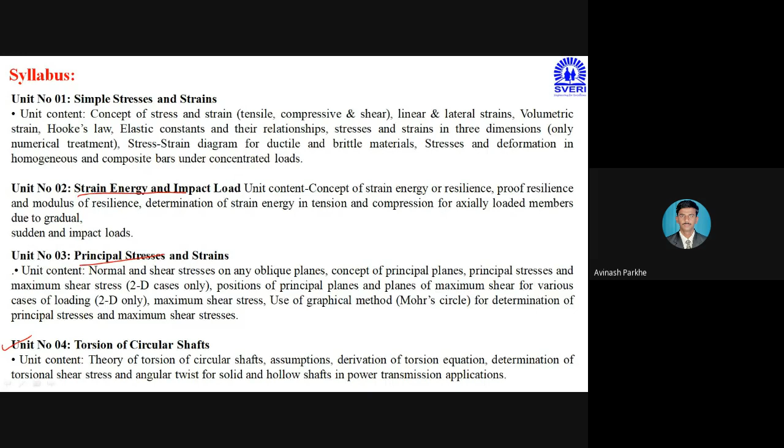So this is about chapter number 4, and in the second section, obviously we have discussed all the calculation related to only one structure, that is beam.

In chapter number 5, we are checking the behavior of the beam after number of loadings, meaning we are drawing the shear force diagram, we are drawing the bending moment diagram, and through that particular diagram we can obtain the critical points. We can check the critical points.

So which critical points? Where shear force is 0, where shear force is maximum, where bending moment is 0, where bending moment is maximum. Checking all these important points means checking the strength of that particular beam.

Similarly, in chapter number 6 we are calculating bending stresses, we are calculating shear stresses. In the last chapter we are calculating slope and deflection.

That means in all these 4 particular chapters we are checking the strength of that particular beam in the form of calculation of SF, BM, bending stresses, shear stresses, slope and deflection.

So therefore this particular subject is introduced in your syllabus, that is basic strength of material. Strength of material means we have to check the strength of any mechanical component, any civil structure which is used in any type of application.

If I will take the example of, once again, a vehicle.

For example, if we take Tata Motors manufacturing any vehicle, directly they are not launching that particular vehicle in the market.

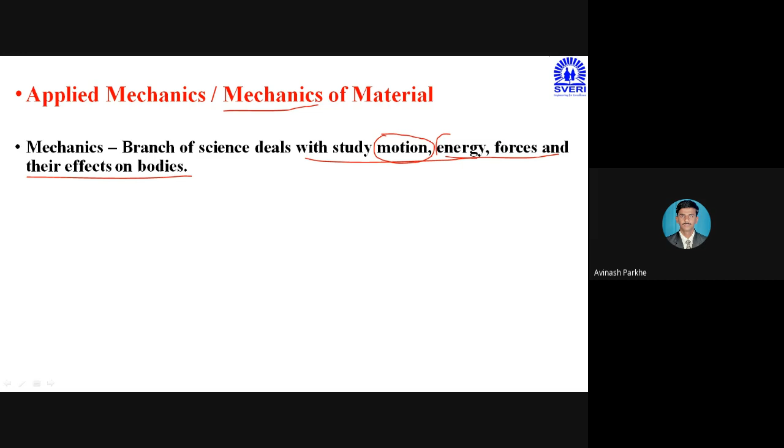That means we are checking the effect of forces on that particular body, which is called mechanics. Mechanics - again the same word is there, material. So only one word is different: strength of material, mechanics of material. Strength means we are calculating or checking the strength of the material in the form of calculation of so many parameters - stresses, strains, bending stresses, shear stresses, etc.

Mechanics is correlated with that particular subject - mechanics means study of motion, energy, forces and their effect on bodies. Each motion, each energy, each force applied on the body, calculating what effect it has on that body, that is checking the strength of that particular material.

So this is the basic definition of mechanics of material. Based on this, applied mechanics - maybe in your first year diploma you have studied this particular subject. Applied mechanics and mechanics of material are somewhat correlated with each other, but there is one basic difference, which we will see.

So the definition of material need not be told separately, it's a simple definition. It is the matter from which something can be made or used for the analysis. If body is not present, if material is not present, then it is not possible to perform the testing. If bodies and materials are not available, it is not possible to perform the testing. Therefore, it is the matter from which something can be made.

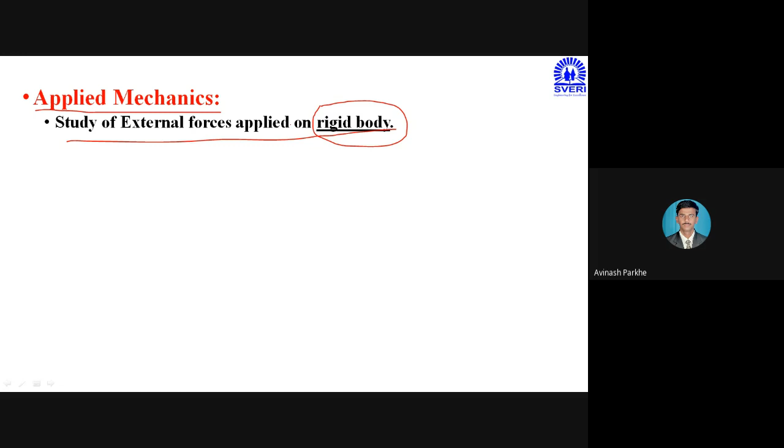If you go through the applied mechanics definition first - applied mechanics is the study of external forces applied on the rigid body. So this word is very very important - study of external forces applied on the rigid body. The body is considered as rigid, and on that particular rigid body the external forces are applied. Rigid body means we know the rigid body - for example, here I will draw one body, and that body is rigid. Rigid means it is fixed from all sides. Let's take an example like that.

This hatching line indicates rigid side. So this is the rigid body, and on that particular rigid body, suppose if any force is applied, some P amount of force is applied. This body will be considered as a rigid body, and on that particular rigid body this external P amount of force is applied, and if we have to study this effect of P on this particular rigid body, it becomes under the category of applied mechanics.

So here the important body will be considered as a rigid body. Rigid means it is totally fixed from all sides. Even if the P amount of force is applied, and if there is a deformation, we can consider this deformation as negligible or equal to zero, because the body is considered as rigid.

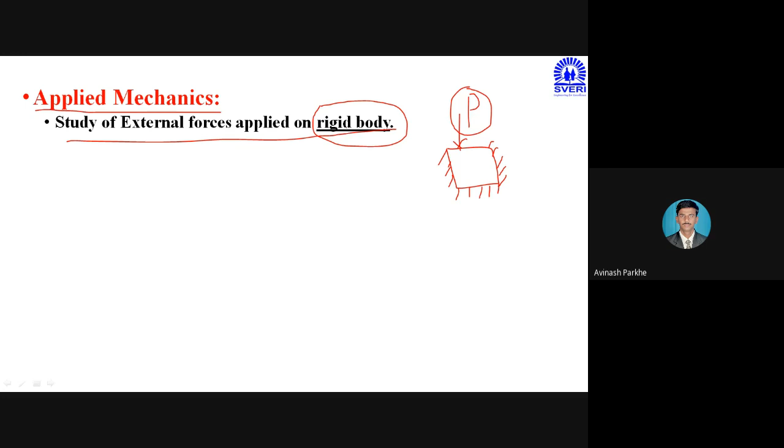So that study we have to do in applied mechanics. But in case of MOM, mechanics of material, or SOM, strength of material, or analysis of mechanical element, if you go through the definition, let's see.

Study of internal effects produced in elastic body due to external force. Here two words are very important: elastic body, and internal effects produced. In applied mechanics, external force is applied. In SOM, here also external force is applied, but the basic difference between applied mechanics and strength of material is related to the body. In applied mechanics, the body will be considered as a rigid body which is fixed from all sides, but in case of SOM, the body will be considered as an elastic body.

So what is the basic difference between rigid and elastic? Rigid means it is totally fixed from all sides, or maybe in the direction of force, but elastic means it is the property of elasticity. Elasticity means if the force is applied on the body, deformation is taking place, then we can say that this body is elastic. And if the force is removed, the body regains its original position, that body will come under the category of elastic body.

You know about one property of the material, elasticity. What is the property of elasticity? If the force is applied on an elastic body, deformation is taking place. If force is removed, the body regains its original position. That property is called elasticity, and such elastic bodies are considered in case of MOM or SOM. So the study of internal effects produced.

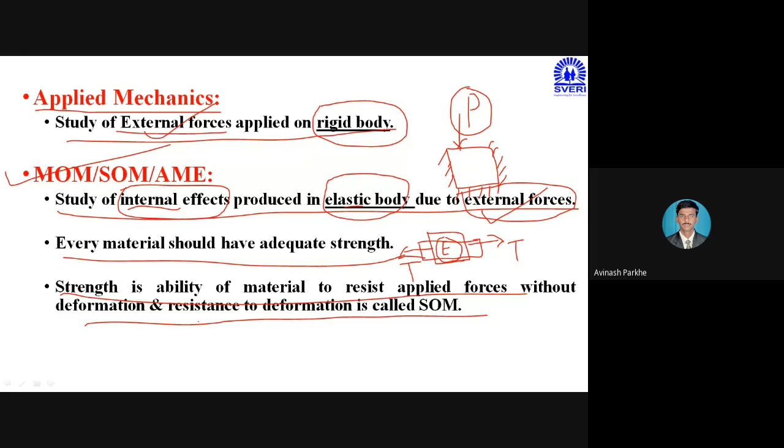Some wording will be given and some options will be given at that time. Many students are unable to remember this particular definition. So simple definition is there for the strength of material: resistance to deformation, or resistance to the applied forces without deformation, is called the strength of the material.

And this particular strength we have to check only for elastic bodies. Elastic bodies, in the sense, force applied, body changes its original position; force removed, body regains its original position. You can take the example of rubber. If I apply load on the rubber, its length increases.

At certain point, if I reduce the load, that rubber comes to its original position. But sometimes, if that load increases beyond the limit, लोड जर त्या प्रमाणाच्या बाहेर गेला आणि जरी आपण फोर्स रिमूव्ह केला तरी पण काही वेळा ती बॉडी ओरिजिनल पोझिशनला येत नाही. व्हाय? वी हॅव क्रॉस्ड देअर इलॅस्टिक लिमिट. एकदा का त्या बॉडीनं तिचं इलॅस्टिक लिमिट क्रॉस केलं आणि जरी तुम्ही फोर्स रिमूव्ह केला तरी पण ती बॉडी ओरिजिनल पोझिशनला येत नाही. इलॅस्टिक पॉइंटच्या आतमध्ये जेवढ्यापर्यंत तुम्ही फोर्स रिमूव्ह कराल तेवढ्यापर्यंत ती बॉडी तुमची माघारी येईल.

Therefore, in chapter number 1, we have to study the stress strain diagram for ductile material. In case of ductile material, there are 2 points: proportional limit and elastic limit. Within the elastic limit point च्या आत जर तुम्ही फोर्स रिमूव्ह केला तर बॉडी ओरिजिनल पोझिशनला येऊ शकते. But if that material crosses its elastic limit point, and at that time if you remove that particular load, the body does not regain its original position. It will remain as it is in the deformed condition. So that elastic point is very, very important, and those elastic bodies we have to study in this particular subject, that is strength of material.

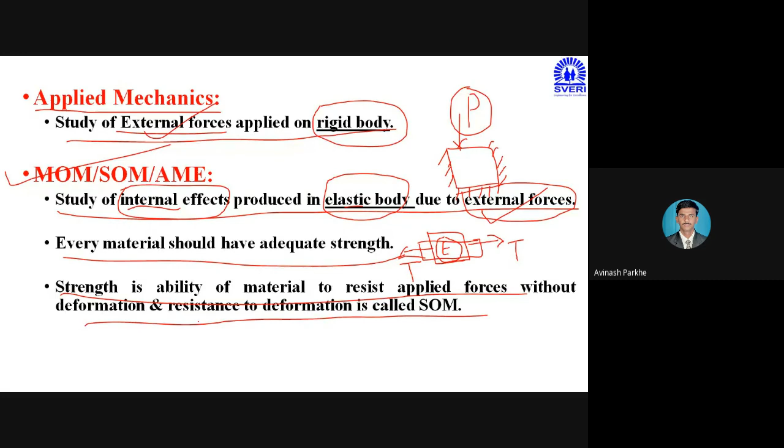Maybe you have performed this in your diploma. I don't know whether you had practicals in a subject like measurement and metrology, whether testing was included there or not. But if that machine is available in your college, maybe you know about the universal testing machine, in short form called UTM. These types of machineries are available in laboratories or colleges for the testing of components.

Through this universal testing machine, we can perform three different types of tests. One is tensile test - if we have to go for tensile testing, this UTM will be used. If we have to go for compressive testing, the same machinery can be used. If we have to go for bending testing, this particular machine will be used. So this is the basic structure of that particular machine.

If you go through this figure, this is the base side. At the center point, one specimen is there - this is the vertical specimen. It is fixed between two grips. This is the bottom grip which is fixed, and this is the holding grip you can see here. In between these two grips, your component is fixed.

If you look at the grips or holes at the bottom side, this bottom grip is totally fixed, not movable. But the top grip is movable through these lead screws. At the top side, this is the load cell. What is the use of the load cell? In order to measure the load - the name itself suggests load cell. Its basic function is to measure how much amount of load is applied on that particular body.

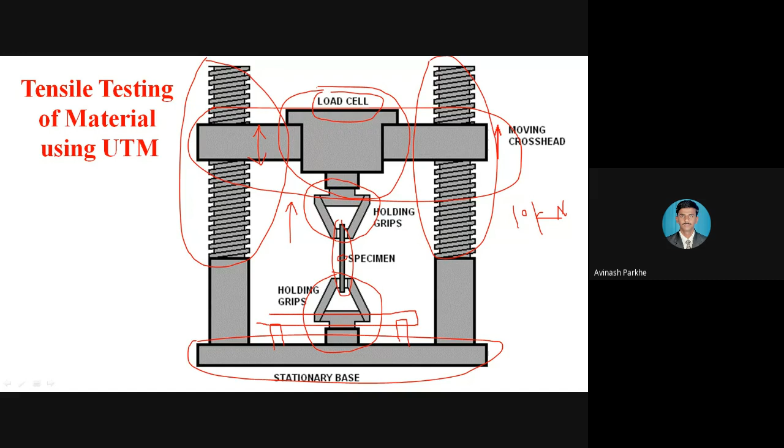This holding grip at the bottom side will be removable. It is one attachment.

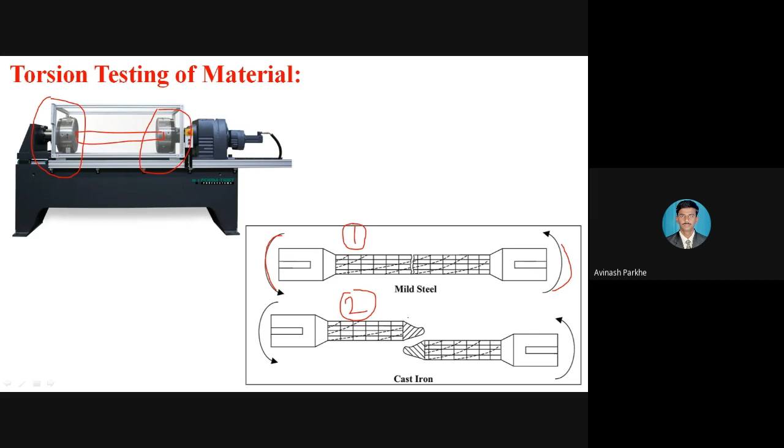So this is figure number 1, which represents condition number 1, that is before the twisting moment. But in the second figure, if maximum twisting takes place, that shaft will get break at this particular center point, and through this you will get to know how much amount the shaft got twisted.

So in order to find the twisting moment, or sometimes to calculate the torque, this is the torsion testing machine. It is also available in industries, and sometimes it is also available in colleges to perform such types of testing.

Now why is this particular testing needed, why can't that shaft be tested by the tensile machine? Because in the shaft, which important parameters are there? Tensile stress is not important, compressive stress is not important in the shaft. The important parameter is that we have to find out its twisting moment, we have to find out its torque, the amount of torque induced.

Therefore, this torsion machine is especially developed for such types of shaft testing.

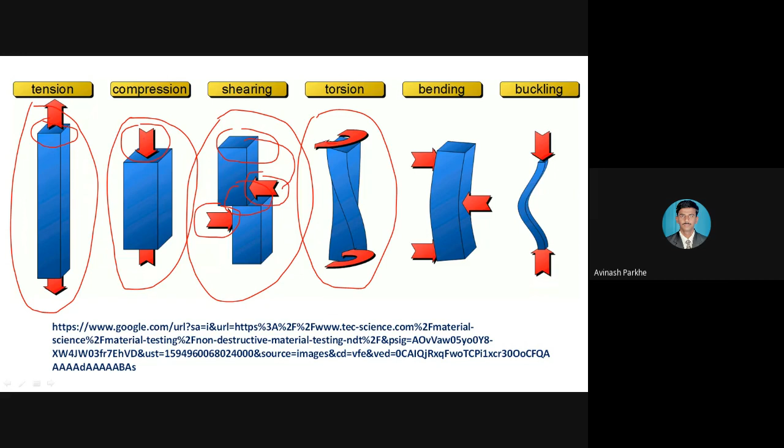Then, in the fourth figure, torsion, twisting moment. See what happens, twisting moment at the center point. The twisting is happening at the top side, rotating in this direction, and at the bottom side it rotates in that direction. That means top and bottom directions are opposite to each other. At the top side it is clockwise, and at the bottom side it is anti-clockwise. So due to this, there is a twisting at the center point.

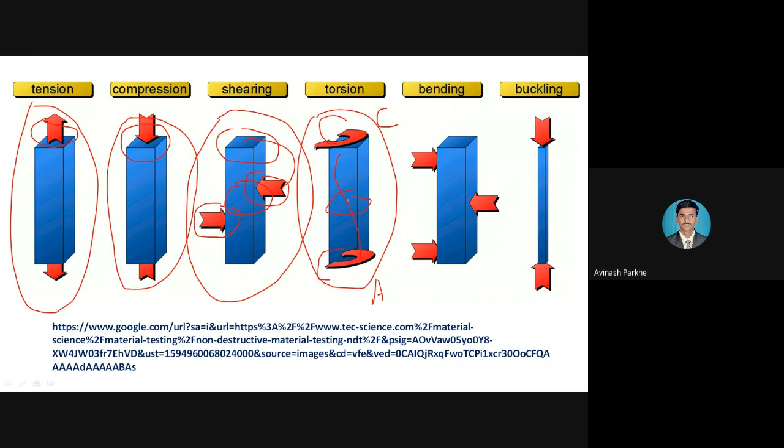This angle that we get, this slanted angle, that angle we have to calculate, meaning we have to calculate the twisting moment of that particular shaft, and it is possible only in the shaft because maximum twisting takes place in circular sections only. Some rectangular sections are also there, but maximum twisting takes place in rotating shafts only. So here in figure number 4 we can observe how the twisting takes place due to the top and bottom twisting, and how the twisting happens at the center point. So that twisting we have to calculate.

Then the fifth figure, bending. Here you can see bending means at the left side it is supported like a cantilever beam, and at the top side the force is applied, and that beam is going to bend on the left side. That means force is applied from the right side and the bending takes place at the left side.

This figure, as I told you, is how we drew a horizontal beam. It is supported like a simply supported beam, and from the top side the load is applied, and due to that applied load, bending takes place at the bottom side. Here only they have changed the structure - the beam is considered vertical, supported at the left side, and the force is applied at the right side. So due to that bending, the bending moment is created and bending stress is developed, and due to that bending we have to calculate the bending stress. So this is about bending.

And the last figure is related to buckling. Always keep in mind, in case of a beam, bending of the beam takes place. Because in case of a civil structure, two important elements are there - the horizontal structure is considered as a beam, and the vertical structure used for supports, which we call column, is the vertical structure. So in case of a beam there is always bending due to the application of load, but in case of a column there is always buckling.

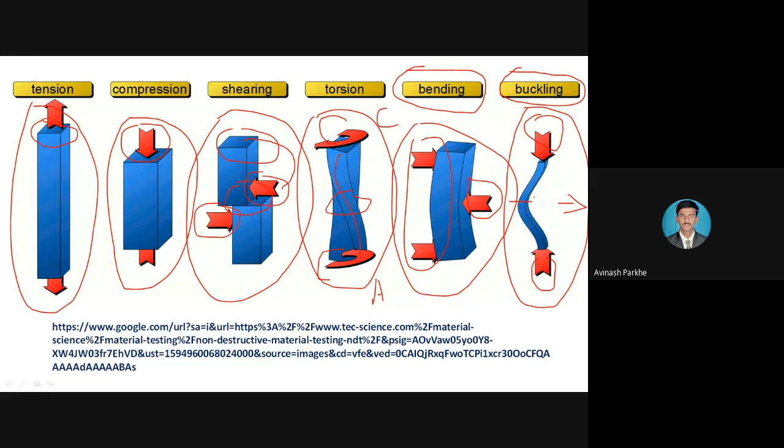So there is a basic difference between bending and buckling. The first basic difference is that bending takes place in case of a horizontal structure, which we call a beam, but buckling takes place in case of a vertical structure, which we call a column. Due to the application of load - see, on a column too there is a type of load, just like a beam is supported, that beam's support is on this column, and also the load of the upper building comes completely on the column. So that buckling of the column also takes place, and that parameter also we have to calculate.

But this buckling of column, that chapter is not in your current syllabus. In the previous old syllabus, buckling of column was a separate chapter for your study, chapter number 8. But now that buckling of column has been removed, and your bending stresses and shear stresses chapters have been separated. Initially they were combined, and this buckling of column was your 8th chapter, but now it is removed from the syllabus because that chapter is not as important for your further study as compared to bending. Therefore, only content related to the beam is there in your syllabus, and buckling of column is removed from your syllabus.

Just for your better understanding of how the buckling of column is taking place and how to calculate its parameters. In this particular buckling of column, we have to calculate two important parameters: one is buckling and another is the equivalent length.

Before application of load, the column is perfectly straight and vertical. But after application of load, it will get bent like that. So whatever buckling takes place during that process, whether length increases or decreases, that parameter we have to check in this buckling of column.

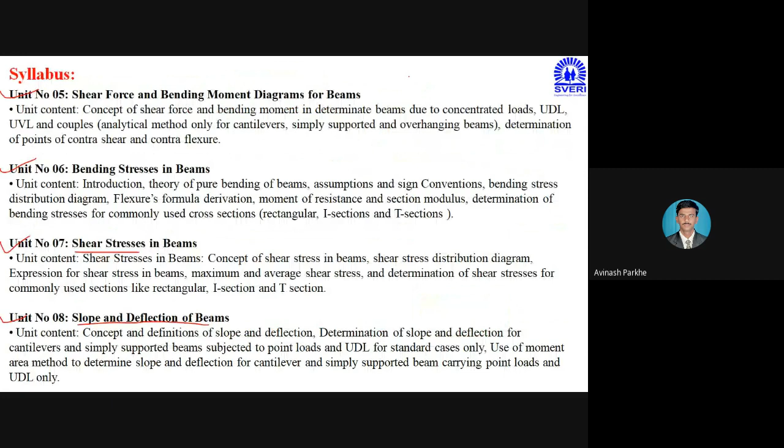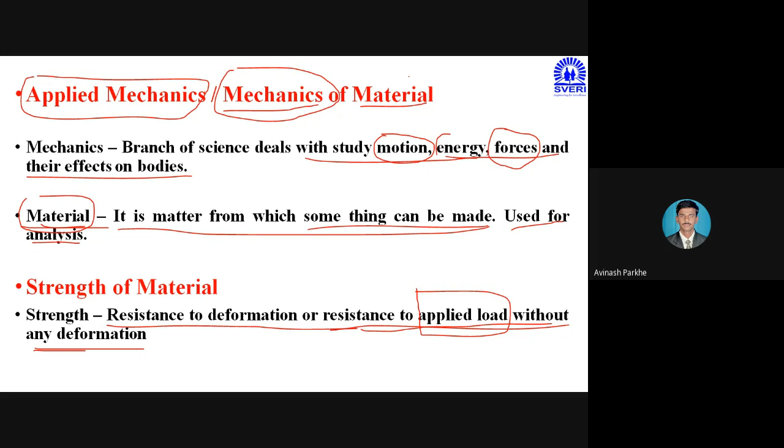From the starting point we discussed the syllabus, then we discussed the basic definitions of mechanics - each and every word, what is the meaning of mechanics, strength, analysis, material - like that we discussed.

Then we discussed the basic difference between applied mechanics and mechanics of material, or strength of material. Then we discussed the types of testing.

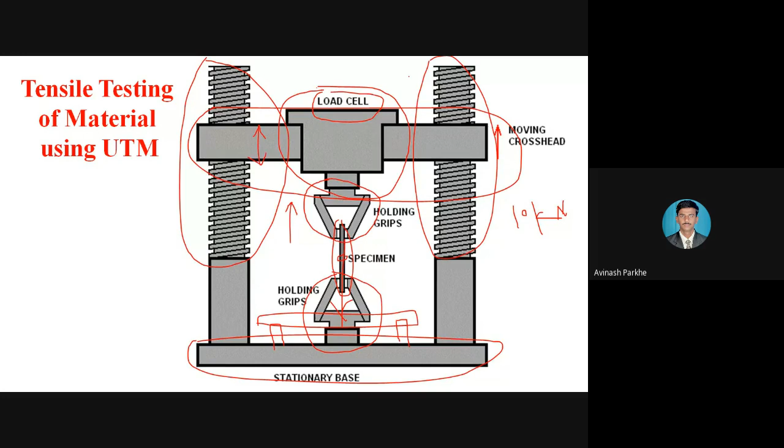Testing means which machines we use for that - that also we discussed in today's lecture. That is, UTM is there. Then this is also performed using the UTM machine.

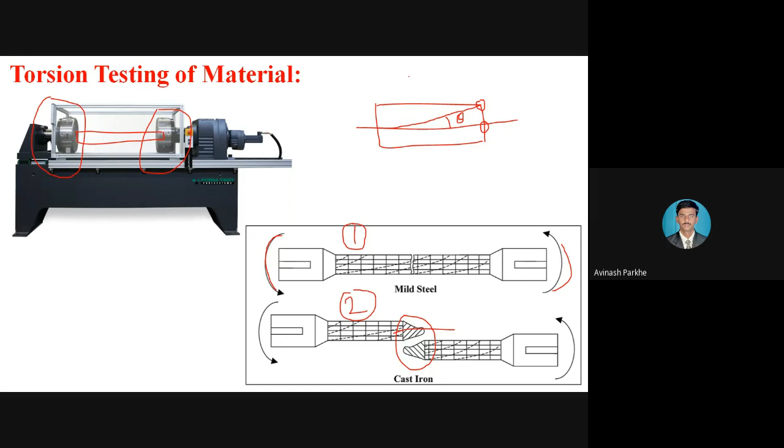Then we discussed torsion testing of the material, what is the basic difference between tensile testing and torsion testing, which components are tested by which machines - that understanding is also very important. And now we have discussed the types of loadings and their effects on the bodies.

We can check through these particular figures. So up to this, if anybody is having any problem, please ask me.

Can we go with this particular manner? Have you understood what I am telling? You can give me a message in the chat box also, no problem. If you are facing any problem, please ask me.

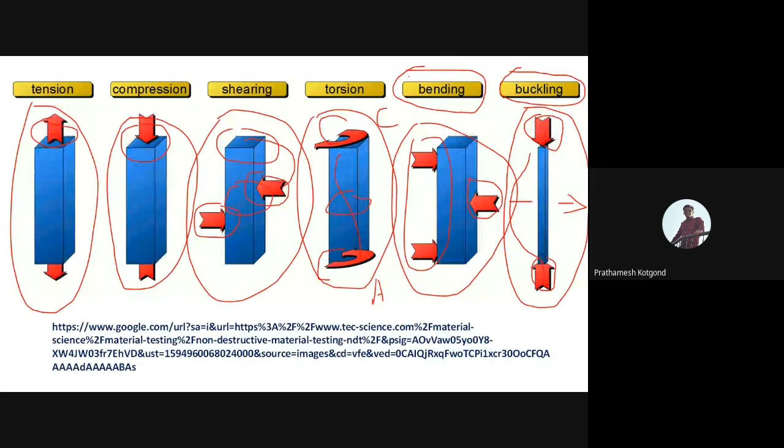Yes. Yes, Prathamesh. No, sir, no problem, sir. Understood, sir. Has everyone understood 100% whatever I am telling? Yes, sir, yes, yes. Yes. No.

Okay, good. With this, I think today we will stop here because the next part we have to start our topic number one. We will wait until next Wednesday and Thursday when the two lectures are there. By Wednesday, maybe your division will get finalized, and I will repeat some basic things since new students will join our group. You will get the roll number and roll call list, your class coordinator will be sent on your group, and once the roll number gets finalized, all students will get admitted in our class.

Then we will start with some basic points once again, maybe half an hour, and then we will start chapter number one. Once I start chapter number one, I am repeating, don't remain absent. Keep or prepare a separate notebook. Whatever I am displaying here, prepare your notes also.

I will give the notes in all respect. Don't worry about the notes for all the subjects. Scanned notes are available with us with proper understanding, proper figures, good presentation. All the notes are available. If you refer to that notes only, you can score in that particular subject. But the requirement is that you have to be ready with your notebook, your pen, and your calculator.